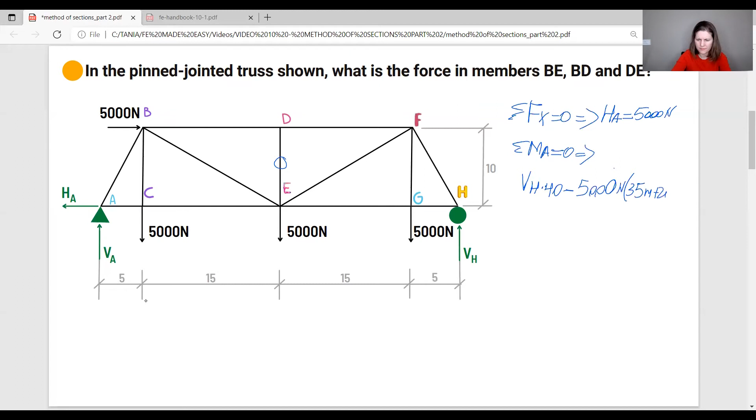minus we have three forces of 5,000 newtons. We'll do 5,000 newtons, and in parentheses, the arms. The first arm is 15 plus 15 plus 5, which is 35 meters, plus the second arm, 5,000 newtons, plus 20 plus 5. Next I have this 5,000 newton horizontal force, which is going to be minus as well, minus 5,000 newtons times 10 meters, equals 0 since we don't have any more forces.

From here it results VH equals, at the bottom, 5,000 times 35 plus 20 plus 5 equals 300,000 plus 50,000 over 40 equals 8,750 newtons. So our VA equals 8,750. Now let's calculate VH. Oh, VH actually equals 8,750. Let me delete this.

Now we'll do sum of moment at point H equals 0, resulting VA times 40 plus 5,000 newtons times 10 meters, minus 5,000 newtons times the arm, which is 35 meters plus the second arm, 20 plus 5 meters, and we don't have any other forces, so all this equals 0.

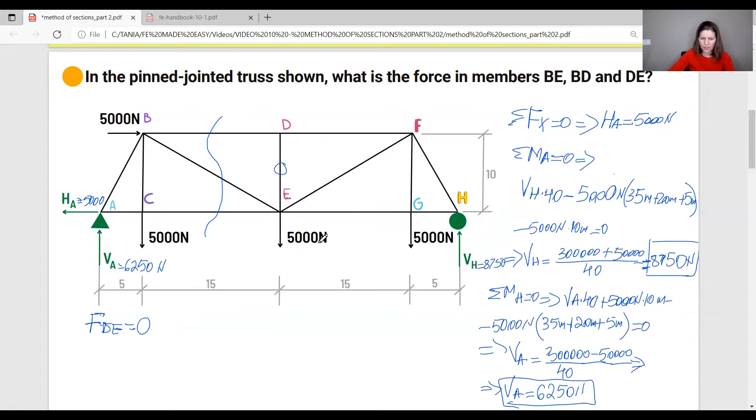Now that we have reactions calculated, we can move on and calculate the members BE and BD. DE is a zero force member. After sectioning the truss here, we will get our truss looking like this. This is the section we are going to use.

By doing the sum of forces in the x direction, I'm noticing that I will have three unknowns, which is not going to help me. So I'm moving forward with sum of forces in the y direction. In the y direction, the only unknown I will have is force BE, which is great because this is the force I have to calculate. So let's do sum of forces in the y direction equals 0.

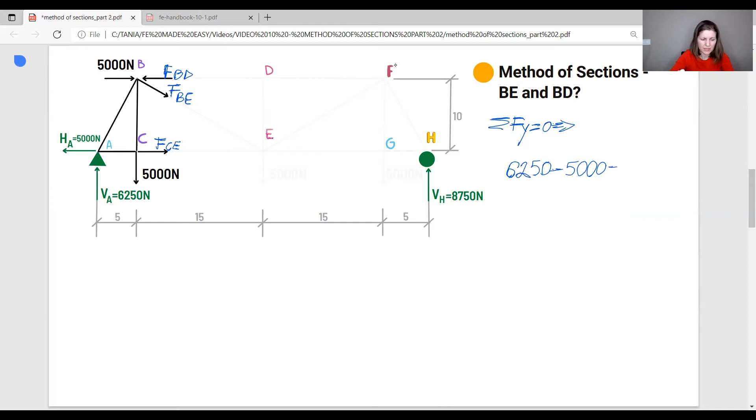I have my reaction 6,250 minus 5,000 minus FBE. Now let's see what is the y component of force FBE. Force FBE is the hypotenuse from the right triangle with the values as shown here. Based on that, we can calculate the y component of force FBE, which will be 10 over 18.03 times force FBE.

We don't have any more vertical forces, so this equals 0. Sum of forces in the y direction equals 0: we get the reaction VA, which is 6,250, minus this force of 5,000 newtons, and minus the y component of force FBE, which is 10 over 18.03 times FBE. From here we'll be able to calculate FBE equal to 2253.75. In order to calculate force BD, we can do the following.

We can calculate the moment either in point C, which will get rid of force FCE, which we don't know, or I would rather calculate the moment in point E, and in this way, we will get rid of force FBE and FCE. I think this is what I'm going to do. So let's calculate the moment in point E.

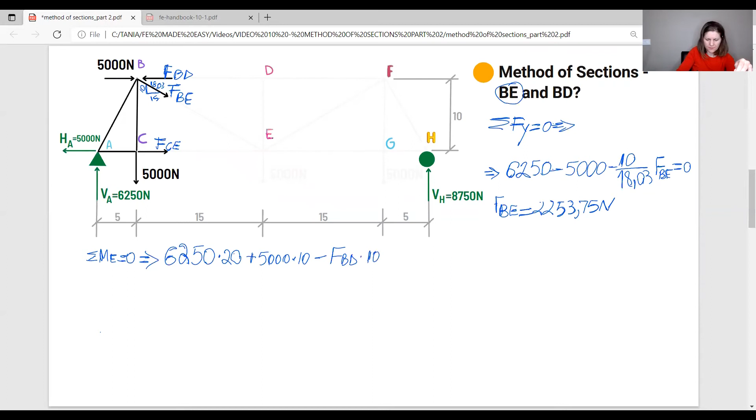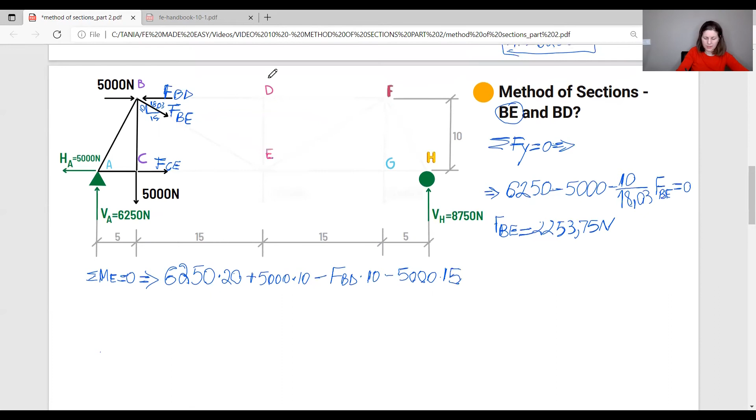Next, we have force BD minus, it's in the opposite direction, FBD times 10. And we have another force here, the 5,000 Newton force, which is minus 5,000 times 15. We don't have any more forces, so this all equals 0. From this equation, force FBD equals 10,000 newtons.

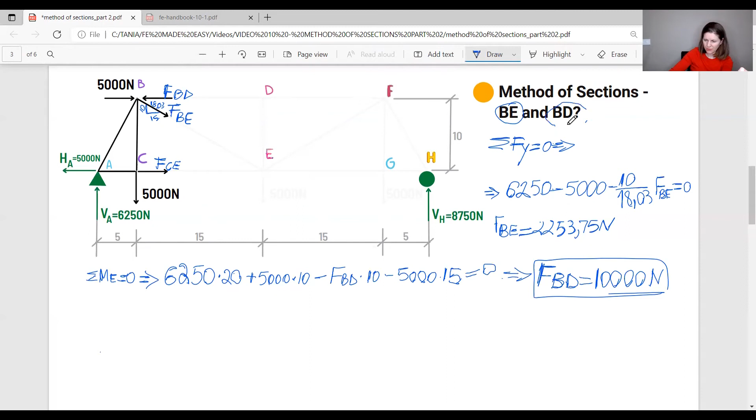So there you go, we have calculated our forces BE and BD using method of sections. Now let's move on with method of joints. We'll start with joint A. We have the reaction 6250 pointing up, the horizontal reaction 5,000 newtons, and the forces FAC and FAB.

The force FAB, if you look at our truss, we are able to compute the hypotenuse from the right triangle. Let's go ahead and do sum of forces in the x and y direction equals 0. FAC minus 5,000 newtons minus the x component of force FAB, equal to 5 over 11.18 times FAB, equals 0. From here, we will calculate FAC equals 5,000 newtons plus 5 over 11.18 times FAB.

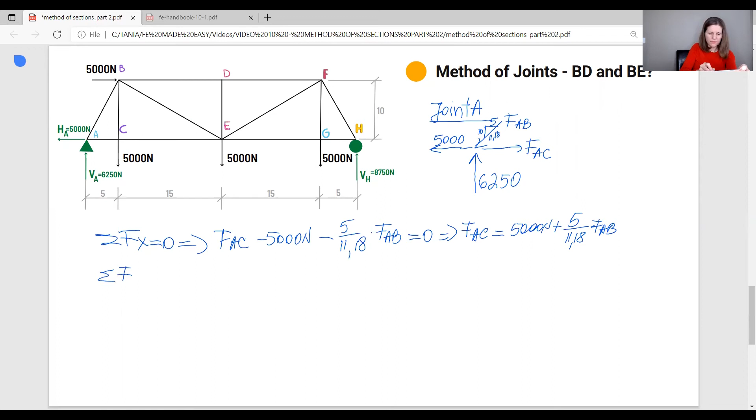Now let's go ahead and do sum of forces in the y direction equals 0, resulting in 6,250 minus the y component of force FAB, which is 10 over 11.18 times FAB, equals 0. From here, FAB equals 6,250 over 0.894.

Resulting FAB equals 6987.5 newtons. Now going back to our first equation, since FAB is 6987.5 newtons, FAC will be equal to 8125 newtons. Now moving forward, let's go to joint C.

We have force AC in tension, and force AC is 8125 newtons. We'll have force CE. Here we have the 5,000 newtons going downwards, and force CB or BC going upwards. From here, FCE equals 8125 and FBC equals 5,000 newtons.

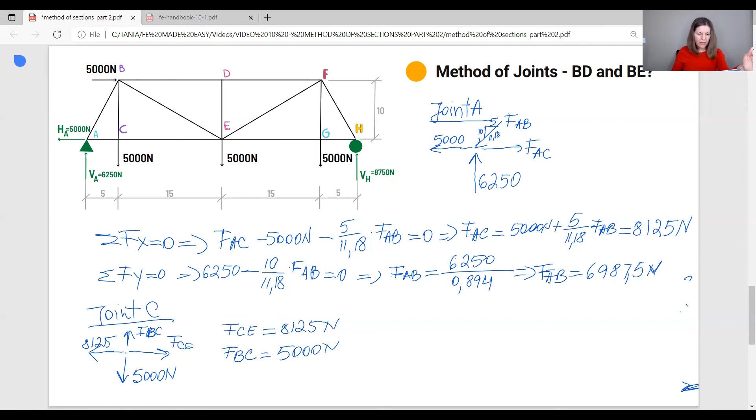Now let's move to node B, where we will be able to calculate BD and BE. So here's our joint B. We have two unknowns, FBD and FBE. Also, I have these values from the right triangle: 5, 10, 11.18, and 10, 15, 18.03. You can compute them looking at this right triangle, and then this right triangle.

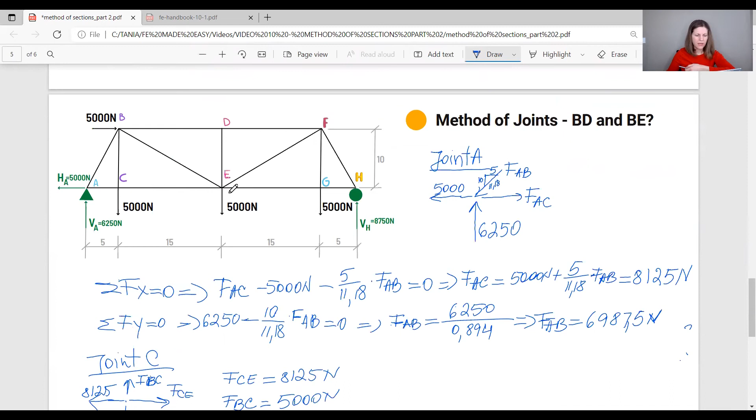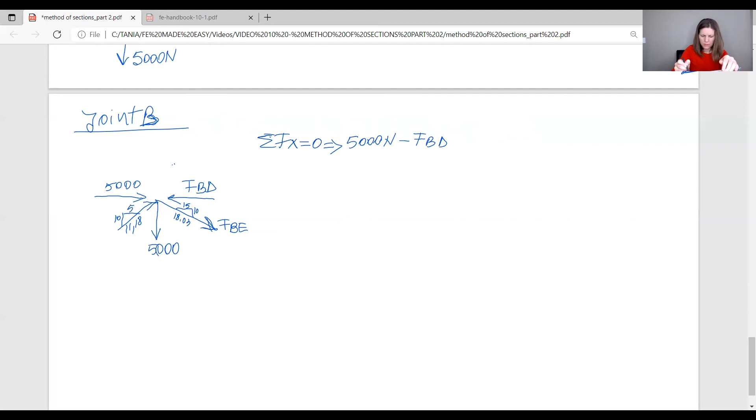Let's move forward and do sum of forces in X and Y direction equals 0. Let's start with sum of forces in the X direction equals 0, resulting in 5,000 newtons minus FBD plus the X component of force AB, which is 5 over 11.18 times 6987.5, plus FBE, the X component of force FBE, which is 15 over 18.03 times FBE.

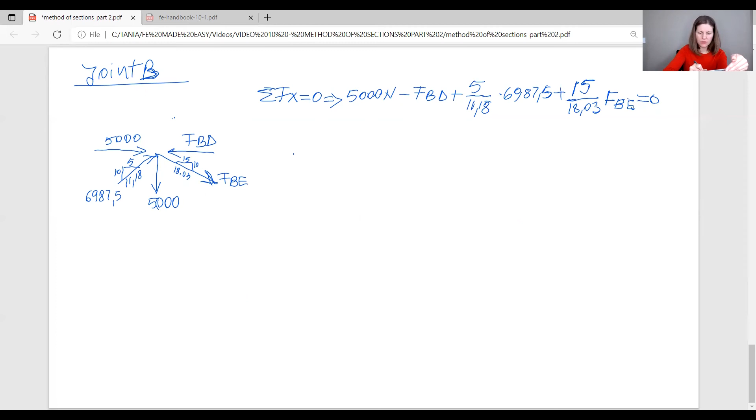From here, FBD equals 5,000 newtons plus 5 over 11.18 times 6987.5, plus 15 over 18.03 times FBE.

Let's go ahead and do sum of forces in the y direction equals 0. We have the y component of this force, which is 10 over 11.18 times 6987.5, minus the y component of this force, which is 10 over 18.03 times FBE, and minus 5,000, equals 0. From here we can calculate FBE.

FBE equals 6250 minus 5,000 over 0.555. From here, FBE equals 2252.25 newtons. Now let's go back in the previous equation and replace FBE with this value.

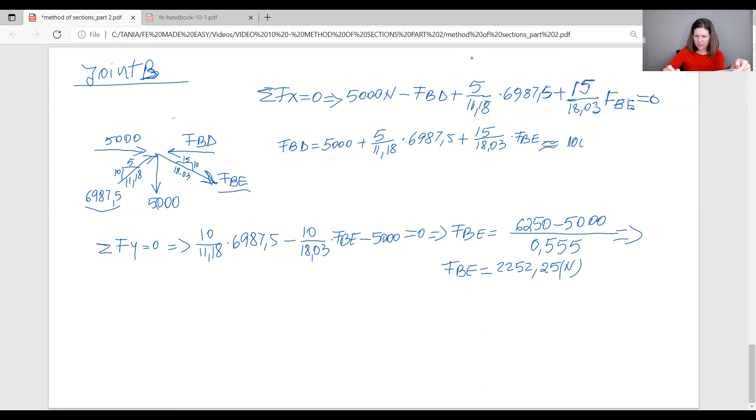And this will give us FBD equals approximately 10,000 newtons. That's it for today, my friends.